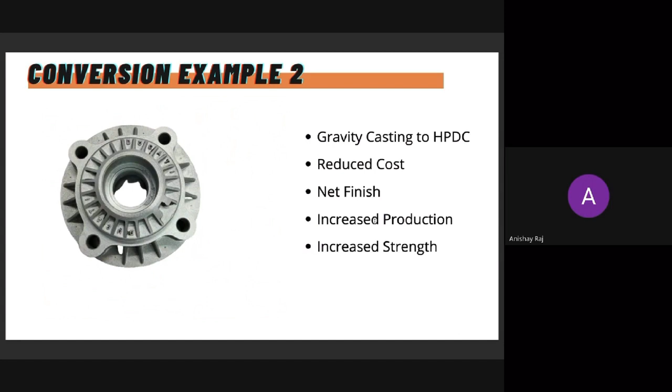So there's a significant increase in production capability and also increased strength, because gravity castings and sand castings are weaker than pressurized metal being cast. So high pressure die casting definitely has significantly higher properties.

This is the third example. This is for a rugged tablet that we make for defense customers, and they were doing sand castings and machining, and that was suitable for maybe about 50 units. When they were prototyping, they got 50 units, and they were considering doing it the same way. They didn't know how big their orders were going to be.

The second it reached 250, they realized that we are spending too much time in machining, and then we recommended, why don't you just switch to high pressure die casting. It's a higher die cost initially, which paid off very quickly for their part. So that was an immediate reduction in cost for them. Obviously increased production capability, increased strength because of the transition from sand casting to high pressure die casting.

And the last thing that they were able to use is the thinner walls. When we were doing sand castings, we needed to maintain 3 mm or 4 mm thickness throughout. But when you're moving to high pressure die casting, you have higher strength, and you can cast really thin walls. At least in magnesium, you can.

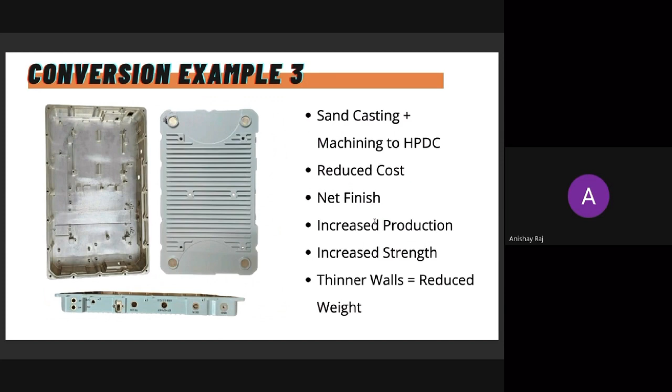With aluminum, there are standards of 1.5 mm, 2 mm sometimes. But with magnesium, you can do 1 mm; we've also done 0.7 mm wall thicknesses. So you get significant stiffness and strength in that. So we were able to reduce their wall thickness to 1.5 mm. They were happy with that. It meets the rugged standard as well. So that's another example of optimization.

So you have an existing component. What are the things that you have to do to your part to make it suitable for high pressure die casting? These are some of those things: removing undercuts, adding ribs, adding radiuses and fillets, optimizing your design for excess material, draft angles, and then engraving and embossing. I'll show what this is. These are all die release considerations.

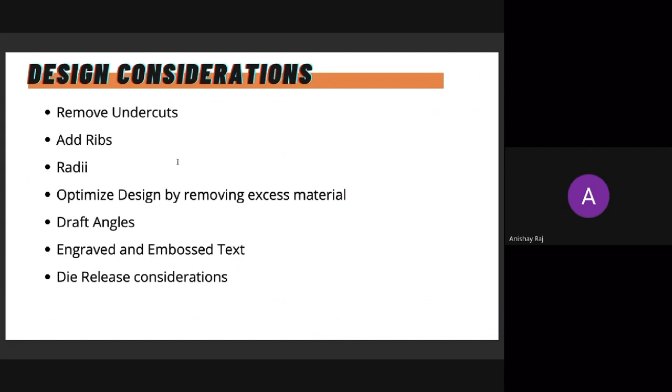And this is just an image to illustrate what this means. These are the two sections of the fixed and the moving side of the die. This is for draft angle. You need a draft on both sides of the die so that the part comes out and does not get stuck within the die. This draft is not much, about 0.5 to 2 degrees, to come out of the die. It all depends on the size of the component.

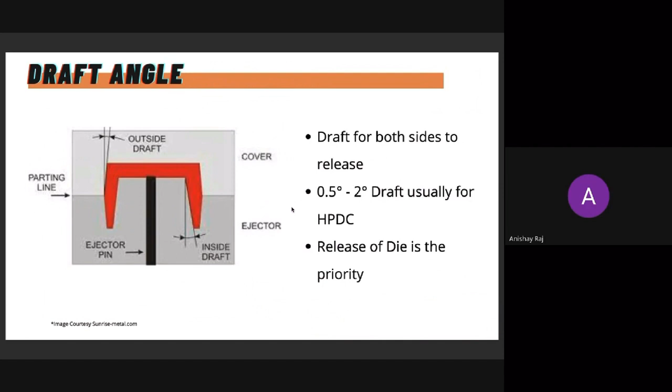The larger the size, the more draft we would request. So that's something that you have to add into your components, on all features which are touching the die. So that's one. The second is radii and fillets.

Sharp corners cannot be achieved in high pressure die casting. So we would discuss with your team to make sure that you are adding radiuses on the outside and fillets on the inside. This not only increases the strength of the component, it is also better for metal flow. So this is something you would have to add for all sharp corners. Maybe in machining you were doing sharp corners, or expected a little bit of radius, but here you need a good amount of radius for high pressure die casting.

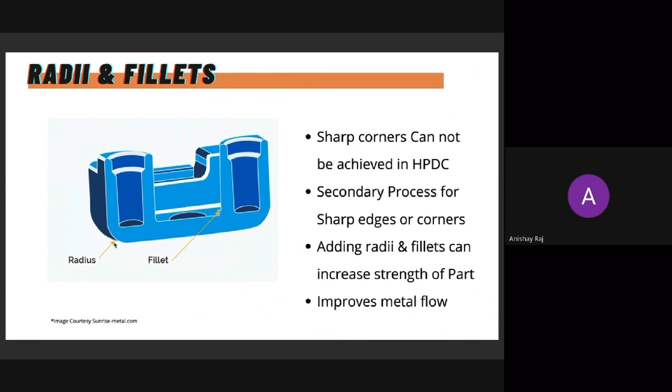If, according to your use case, sharp corners are required anywhere, what do you do then? We have secondary processes to help you with that, sparking being one of them. We can do a secondary operation to create a sharp edge wherever you need for fitment, form, function, whatever that might be, at a later point. But the as-cast part will not have any kind of sharp edge. Undercuts. So removing any features which have undercuts.

So this is just an example where you see the orange component. There's one feature in this casting which is going inside the die. So even though the top die comes out, the bottom is stuck because of this one feature. Now there's a lot of ways of even creating this feature in high pressure die casting. There's a lot of ways of solving this problem.

You could change the orientation of the part. You could change the parting line. So the line over here that is separating the dies, this line is called the parting line. So you can try and be innovative with the parting line. You can change the orientation of the part.

The most commonly done thing is adding another piece of the die, not just the top and bottom, but a side tooling as well. So something that moves sideways, and that would have a few features from this side. So in those ways you can solve all these issues as well, but we would have that discussion in detail with your team to understand, is this feature absolutely required, or can we eliminate that feature, or change the orientation of that feature to assist with the die release, things like that.

Because every time you add a side core, it also increases complexity of die construction. It might also increase the cost of production, and therefore the part price slightly, very slightly, but that is something, if we can avoid, you should avoid.

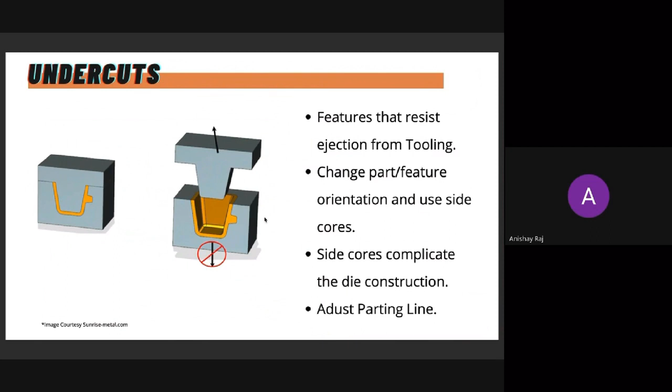Optimizing design. So here's an example where we have a die cast part. This is without creating weight savers. Here you've removed a lot of metal, and you have created a pocket, and this will do the same function as this, and a third version where you optimized it further to have more ribs and more holes as well.

So when you're optimizing design, I can give you a lot more examples if I could show you specific files, but probably we have this discussion with the customer's file as well, where can you add or remove excess material. So removing excess material where possible, using pockets and stuff like that, and also reducing wall thicknesses.

So when you were doing the same component using machining, or with any other casting process, you would have considered a certain wall thickness, which can be further reduced when you're going with high pressure die casting. So that's something to consider. So those kind of optimizations have to be done upfront.

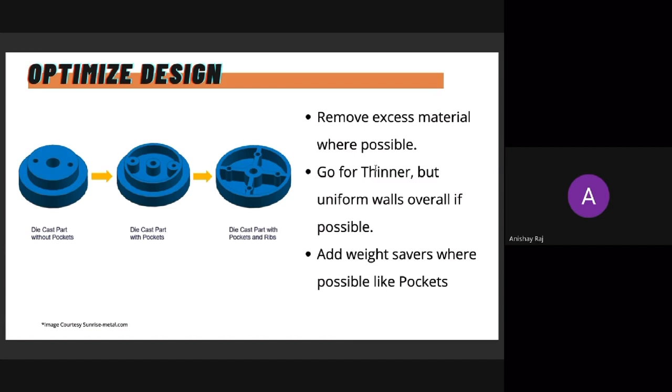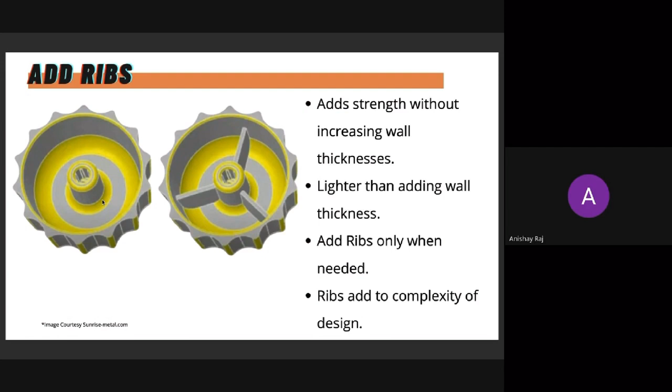Ribs. I'm sure you guys are aware what ribs are used for, to increase strength when you have thin walls. So without increasing the wall thickness, you can still maintain strength. We would recommend that when you have thin parts, add a rib to increase that strength, but only add a rib if it's absolutely needed, because ribs also add to the complexity of the design.

And the last part is text in the component itself. So usually people do laser engraving or regular engraving, or embossing, but that's something that is directly possible in the die itself for high pressure die casting. So you can get any kind of text written on the part, and not as a secondary operation. So there's an additional reduction in secondary processes, and that's one more thing you can keep in mind. These are just a few.

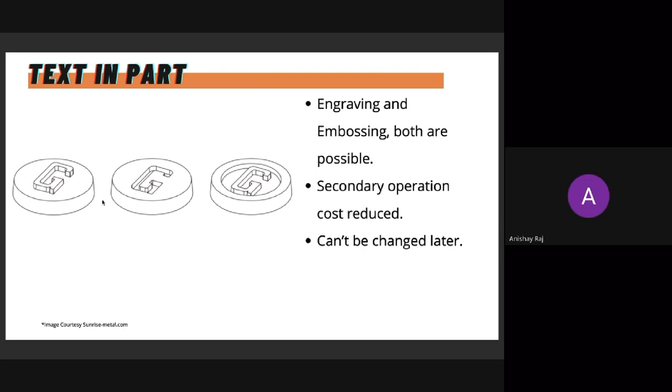I'm sure when I'm looking at individual components of customers, there's a lot of specific things that we would tell you about die release, where it's challenging and what else. But these are the general major ones to consider. In terms of metals that can be die casted, I already mentioned zinc, aluminium, and magnesium. So we'll take you through the die casting versions of that.

So magnesium to begin with, this is not commonly used in India. It's just making a late entry in India. Electric vehicles, drones, satellite programs and defense programs have been using this forever now. But industrial equipment and new age industries like robotics are starting to use magnesium significantly more.

And why it is used, it's the lightest structural metal on the planet. Anybody who's trying to lightweight their product in today's day and age, there's no reason why you're not using magnesium. It's used as a replacement for aluminum, steel, plastics, and titanium. When you're replacing a steel or titanium component with magnesium, you just have to increase thicknesses to meet the same factor of safety.

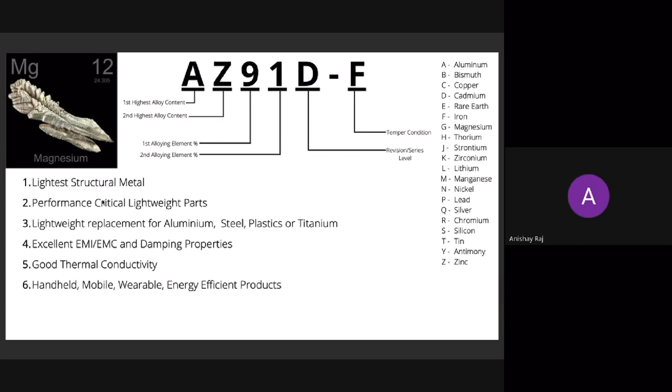Reduce thicknesses when it comes to plastics. If it's an aluminum component, you can use the exact same design for magnesium. So that's something you should know. In terms of damping properties, magnesium has an excellent damping coefficient. So it is a crack resistant, impact resistant metal, and it has 20